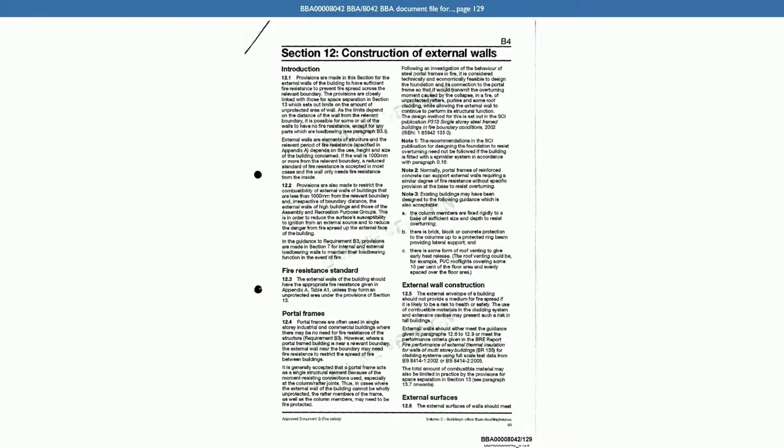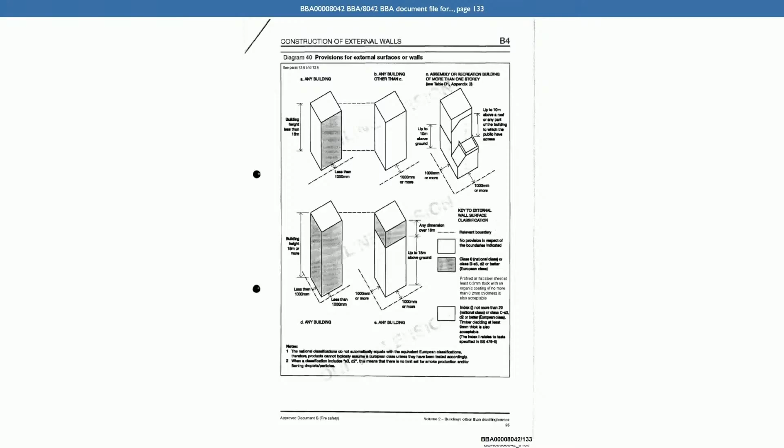Can we, I think we could take this quite quickly, but just to put it in front of you, can we look at page 133, please? Still within the technical file, this is an extract from approved document B, known as diagram 40, entitled Provisions for External Surfaces or Walls.

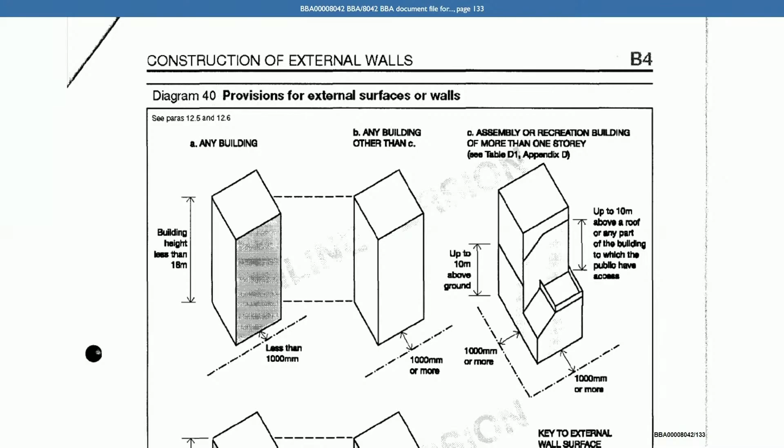If you look at the diagrams at the bottom of the screen, you can see there is letter D, any building, and letter E, any building. With letter D, you've got a boundary of less than 1,000 millimeters for a building of 18 meters or more in height, and E, same again, but this time 1,000 millimeters or more. Can you see that?

But there are parts of this build, these two diagrams, which are shaded. Yes. And so you've got one on the left, which is fully shaded, and the one on the right, letter E, which is partly shaded. Any dimension over 18 meters is the part that's shaded.

And then on the right-hand side of the screen, you can see under the rubric key to external wall surface classification, the second box down, which has the corresponding shading, says class 0 national class or class B S3 D2 or better European class. Were you familiar with diagram 40, this page of ADB, and specifically this part of it that I've just shown you?

All I knew in this regard was approved document B allowed the use of materials of limited combustibility to be used above 18 meters. That's all I know with regard to this. I may have looked at the details as shown here, but I can't remember. I never went into details because, as I say, this wasn't my area. It was way outside my area of expertise, really.

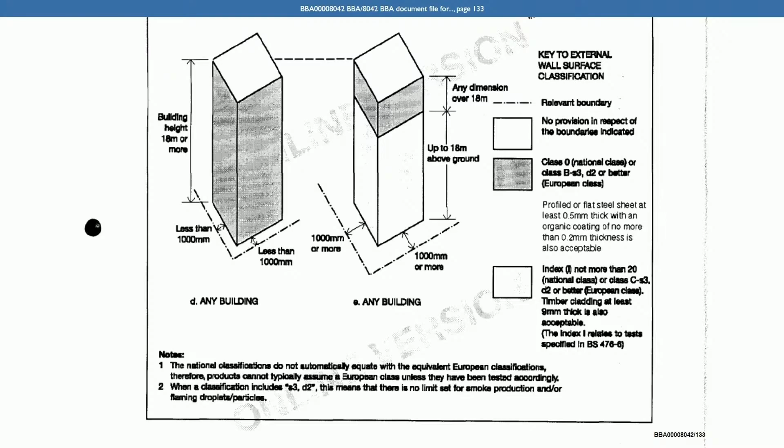Let's turn to your role then. You have confirmed you are a project manager at the BBA. That's correct. As a project manager, am I right to understand you don't necessarily have all the technical skills to make all the relevant assessments yourself? That's correct. And you would manage other people's input into the assessment, is that right? Correct. Are there areas you would have the technical skills to assess yourself?

My main role within the BBA was I was assigned to the structural department, and I would manage projects as normal by consulting various sections who would have input into the draft certificate, which I would make a start on. I also looked at the structural aspect. My area of expertise was in structures, strength of material structures, that I could make assessments. But on top of that, I would also offer any advice or technical support to any of the departments as required.

Now I'd like to ask you some questions about the reporting lines at the time. In 2007, did you report to Jeff Gurney? I believe so, I think somewhere around that time the BBA was undergoing some organizational changes. Jeff Gurney was my section head. And who did he report to? He reported to the technical manager, Brian Haynes.

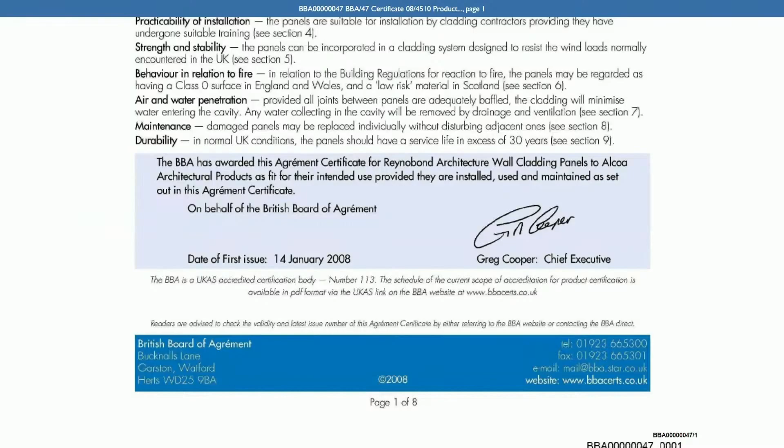Yes. What was your role in drawing up a contract for the subject? I think the project manager would draw up a contract, and with the approval of the section head, it would just go through. So I do recognize this particular email.

Would you read the technical file thoroughly in the process of drawing up a contract such as this? The technical file was compiled after the project was completed.

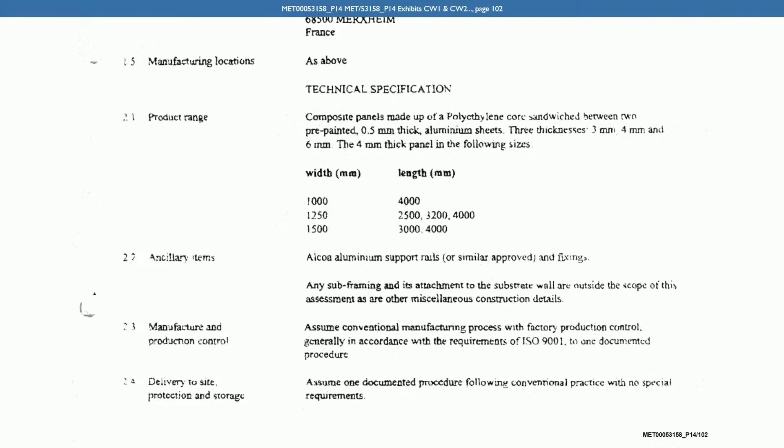When you look at 1.2, if we can scroll back up to the top of the screen, same page, under paragraph 1.2, under product type, where it says system, composite wall cladding system, what would be, or what was indicated by the word system there? I think the intention was to draw attention that these composite wall panels would be used in a cladding system, but it's not meant to be an accurate definition of the product we were assessing.

Were you intending to capture simply the flat product, the panel itself, or the product as fabricated into cassette or rivet fix, or attached to a fixing system? Our assessment was to ensure that the cladding material, this composite material, could be used in any cladding system, be it cassette or riveted. Our assessment stopped at the fixings. Anything beyond that would not be covered by the certificate. I think the certificate makes that clear.

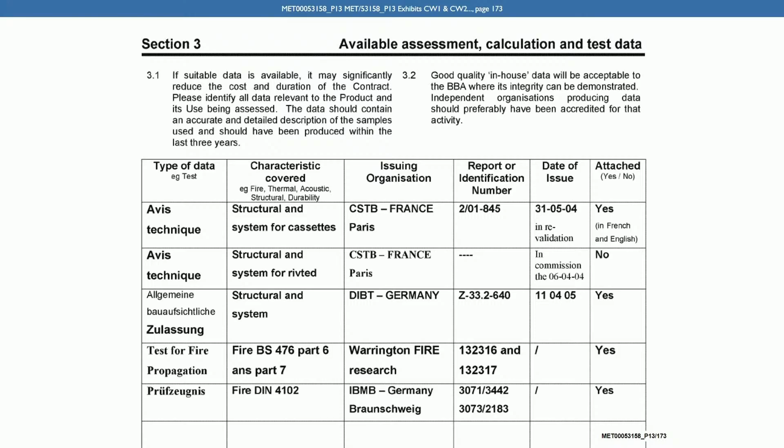When you looked at this application, did you notice there were two different technical opinions from the CSTB, one for cassette system and one for riveted system? Yes, but basically because their approach to assessment was different. They were assessing the system rather than just the panel on its own. Did you read these, do you think, at the time? So I think yes, I vaguely remember this. Yes, and as you say, there's nothing about these technical assessments about fire safety.

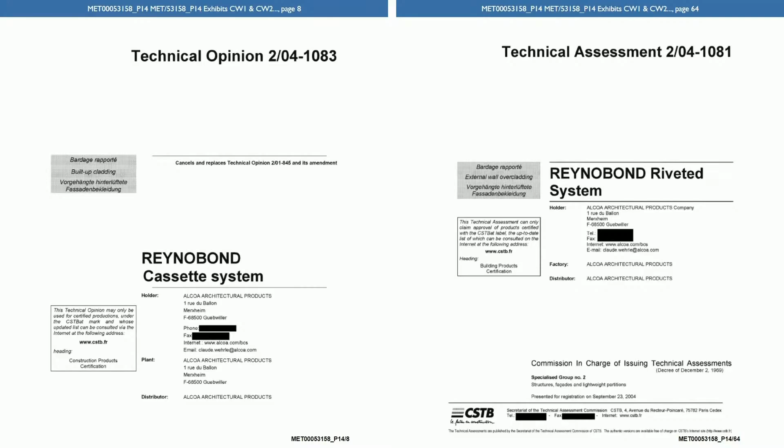Now can I then turn to the discussions that you had with Arconic starting in November 2006? Can we stay in this exhibit run, please, and go to page 114? This is an internal Arconic document, Mr. Gregorian, so you may not have seen it before, and you are unlikely to have seen it at the time.

Yeah, just pausing on the words next to your name there, ENG System Dept. Is that Engineering System Department? Engineering System Department, yes. Right. Do you remember this meeting at all? Late 2006, I can't remember, to be honest. No. All right, can't remember.

Let's look down at the document then and see how much of it you can help us with. If we go to item 1, you can see reason for visit: exploratory call to assess situation. I think that means assess situation as follows, with C. Wehr, that's Claude Wehrle, in attendance. Do you remember whether Mr. Wehrle attended in person or whether he attended by telephone? I can't remember that.

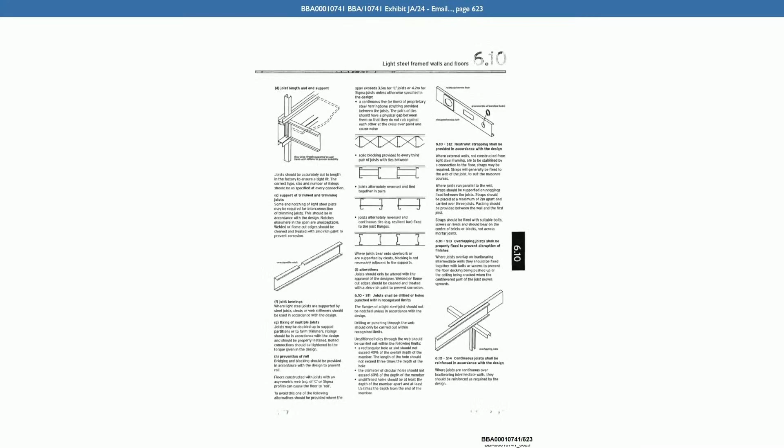Do you remember that? Yeah, I can't remember it, but that's what I must have said. The reason for that being a different approach to the assessment, and the fact that Avis Technique would provide all the information we need.

Do you remember - well, if we go to the top of the page we'll see it. Top of the page, second email down, the new cost was, as you can see, £18,015. So that was a reduced cost, wasn't it? I suppose, yes. Yeah, yes.

The cost reduction that was agreed and the reduction in technical hours that was agreed - was that as a result of the meeting on the 2nd of November 2006? It must have been, yes, I can't remember. It must have been. And was that reduction made because you could use the CSTB data for some of the aspects of the assessment? That would be my guess, and Bob Keyse would have agreed to that, I guess.

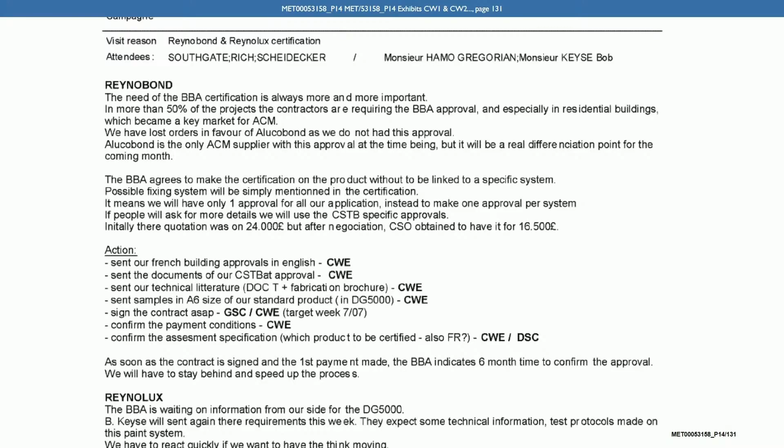Now, we saw from the 2006 file, as I mentioned a moment ago, that the BBA had on its file the CSTB Avis Technique approvals, didn't it? Yes. And do you remember I showed you these? They were two separate ones, one for cassette and one for rivet, yes? Mm-hmm, yep. Why wouldn't it have made sense for the BBA to make its own assessment on each fabricated system, in other words a BBA assessment on rivet and a BBA assessment on cassette, in the same way that the CSTB had done?

As I say, BBA philosophy was, I think, from an engineering standpoint, probably more sensible because the variables in a system are much more complicated than just approving a panel for suitability. So we adopted that approach for assessment of this particular product.

Could the BBA have insisted on assessing cassette and rivet separately in the same way that the CSTB had done under the Avis Technique approach? No, as I say, I thought from a quality control point of view, it was a much more sensible approach to assess the product rather than the system.

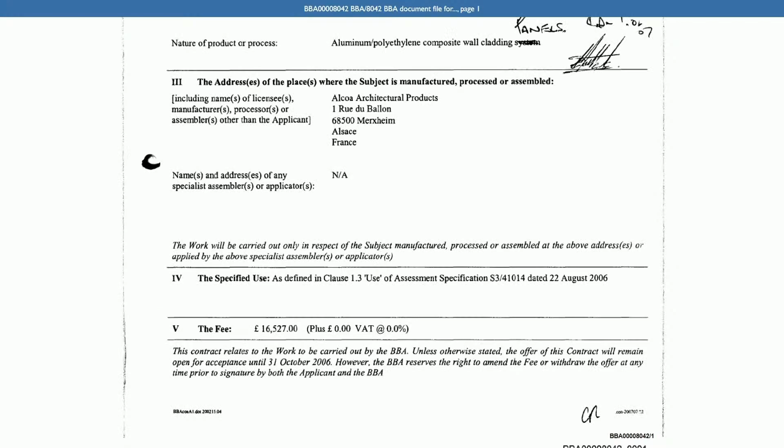Yeah. Now, we can see that there's a price, if you look a little bit down, further down the page, under item Roman 5, the fee, it's £16,527 and no VAT. And if we turn up a little bit, up the screen to item Roman 2, you can see the subject and proprietary name, Reynobond architecture.

Somebody's written 'architecture' in manuscript. And then underneath that, nature of product or process: aluminium, polyethylene, composite wall cladding system was typed, but then that's been deleted in manuscript and somebody has written in hand 'panels'.

Do you see that? Yeah. Do you know who wrote that? I can't remember who wrote that. Obviously at some stage we have decided that this is a better approach, and the contract was changed accordingly.

Does that change reflect the agreement or arrangement arrived at in Watford in the meeting earlier in February 2007 that we've been discussing? It must have been as a result of that, I suppose. I can't comment on that.

Now, we know, as I've shown you, the certificate that was eventually issued in January 2008. I want to look a little bit more closely at the assessment that led to that certificate. Can we turn on in the technical file, please, to page 11?

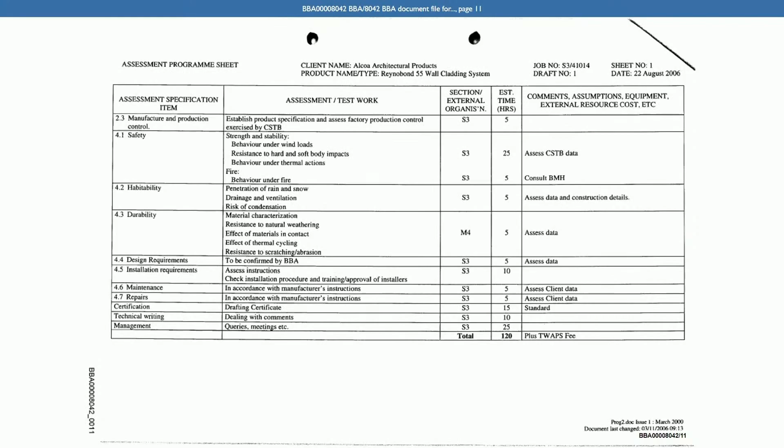This is the assessment program sheet. If one looks at the top left-hand side of the screen, you can see that. And the product name there is Reynobond 55 wall cladding system, as you can see in the middle of the page. And again, it still bears the date of 22nd of August 2006. Do you recognize this document?

Yes, I do. Did you prepare it? I think so, yes. Looking at the date of this document, and I know it says August 2006, would you have prepared it for the initial contract pricing? Yes, I think so, yes.

Right. Can we just be clear? Do you think you might have prepared this at the same time as preparing the offer for the contract in 2006 and then just not updated it when it came to finalizing the contract in 2007? Yes, I suppose. Yes, yes. I don't want to lead you into error by suggesting that, but we're trying to work out the dates.

Yes, it clearly says cladding system, but obviously the contract has been changed, and so has the pricing, and the number of hours, I think, must have been changed as well accordingly.

Can we then just be clear whether, even though there was that change from system to panels that we've discussed, you would still have followed the assessment program set out in this document when doing your assessment for the certificate that was ultimately issued? As soon as it was established that we were assessing the cladding panels, I would assess the product accordingly.

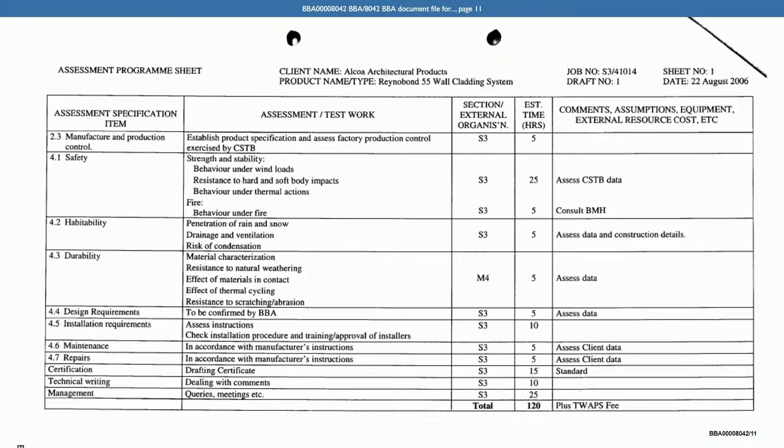Forgive my interrupting, Mr. Millett. Mr. Gregorian, just help me with this. You said a moment ago that you couldn't get any response from BRE - do you remember saying that? Yes. I took it from that you had contacted BRE yourself to ask for their assistance - is that correct? Yes. Would I be right in assuming you sent some form of information to BRE in order to obtain their assistance? Exactly, yes.

Can you tell us what it was, please? Documents, appropriate documents, maybe test data, and so on - anything necessary to make a fire assessment. I can't tell you exactly what it was, but it was all the information that Sarah would need to make an assessment.

Some of that information was presumably test reports, is it? Yes, I'm sure - yes, there must have been some test reports. Can you remember in what form you sent them or how you sent them? Most probably by email.

Right, thank you very much. Yes, Mr. Millett, carry on.

Thank you. We are going to come to some of that later on, when we'll explore the precise documents in a bit of detail.

Can I just understand this conversation — did Mr. Haynes report to you what Sarah Colwell had told him after the conversation had ended? He didn't. He just approved, or rather checked and okayed the particular statement relating to fire. I have no details as to what conversation went on. I have no idea. All I know is that I distinctly remember him talking to Sarah.

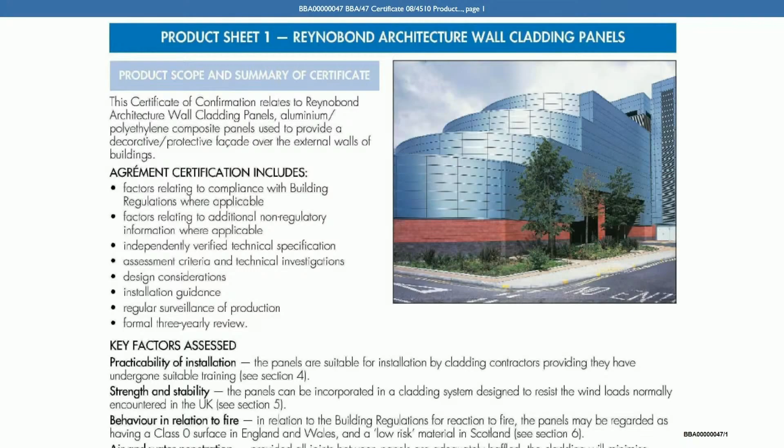We'll come back to this page shortly, but can we go to page 3, please? At the top there, you'll see in the dark blue band, the word general, and under it, it says this: this certificate relates to Reynobond architecture wall cladding panels comprising an aluminium/polyethylene composite material fixed to an aluminium subframe to provide a decorative/protective rain screen facade over the external walls of buildings, as we saw on the front. And then it says the subframe and its attachment to the substrate wall are outside the scope of this certificate, as are other miscellaneous construction details.

Does that mean the metal rails that the cladding is fixed to? That's correct, yes. It's not covered by the certificate, that's correct.

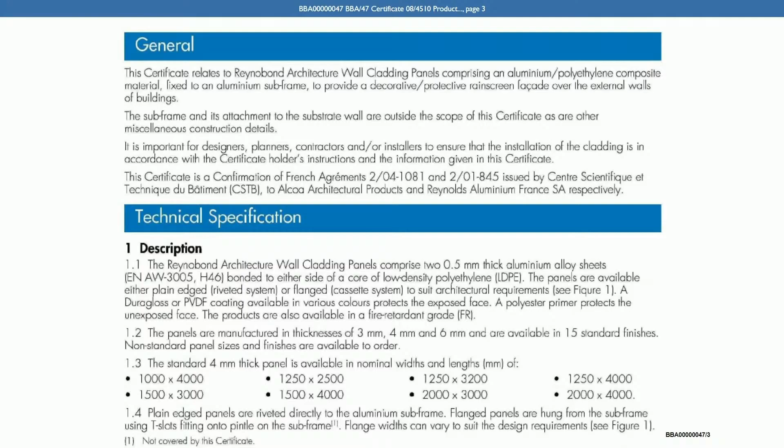And what about other elements of the facade build-up, such as the insulation and the cavity barriers? They're presumably, no, they're not covered at all. Outside, no. Now, if you go down to the next blue header, technical specification, you can see description.

Underneath that, it says 1.1, the Reynobond architecture wall cladding panels comprise two 0.5mm thick aluminium alloy sheets, and then there's a specification there, bonded to either side of a core of low-density polyethylene, LDPE. The panels are available either plain-edged, riveted system, or flanged, cassette system, to suit architectural requirements, see Figure 1. A Duragloss or PVDF coating available in various colors protects the exposed face. A polyester primer protects the unexposed face. The products are also available in a fire-retardant grade, FR.

If we skip down to subsection 1.4, it says this, if you just read with me: plain edge panels are riveted directly to the aluminium subframe. Flanged panels are hung from the subframe using T-slots fitting onto pintle on the subframe. It says flange widths can vary to suit the design requirements, see Figure 1. There's a little footnote underneath that which relates to the word subframe, and again it says not covered by this certificate.

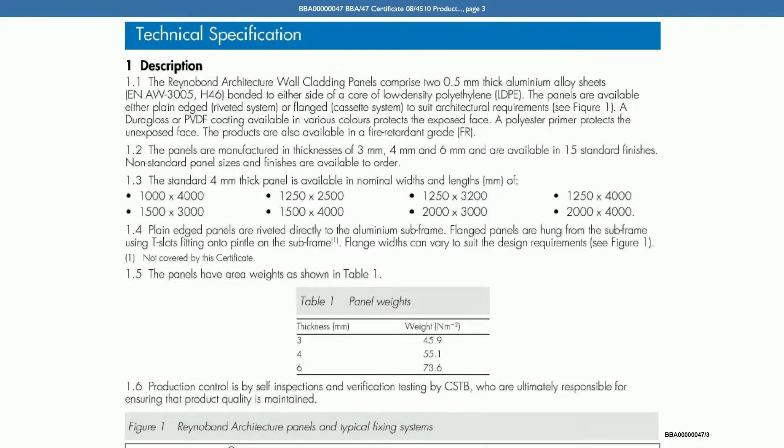Now, the Figure 1 that's referred to there is apparent if you look a little bit lower down the same page. If we can scroll down to Figure 1, have that fully on the screen, you can see it says Figure 1, Reynobond architecture panels and typical fixing systems. And there within Figure 1, you can see two systems. You've got on the left, riveted system, and on the right, cassette system.

Do you remember where those diagrams came from? They must have come from the CSTB documents. So not from Arconic, is that right? They might have come from Arconic, but normally I would imagine CSTB would include some details of this nature in their certificate. Do you recall how Figure 1 came to be on this certificate?

It was considered appropriate to include these just to show what can be done with this cladding material, with this panel material. Was it you who decided that Figure 1 should be inserted in this certificate? It is quite normal, accepted practice within BBA to include some construction details of this nature.

Well, it's a bit more, isn't it, than showing what can be done with this cladding material. Isn't the certificate telling the reader that the panels, whether riveted or cassette, are covered by the certificate?

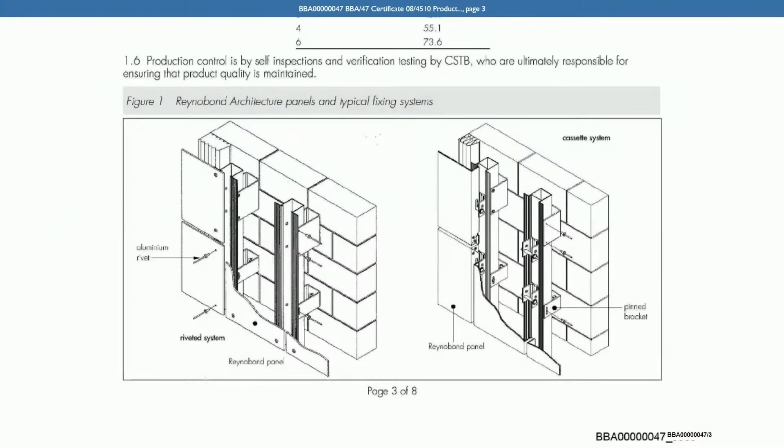Well, you say that. Let's just go back to 1.4. You could see the footnote, footnote 1 there, not covered by this certificate. And that relates, doesn't it, to the subframe. And that's consistent with the exclusion of the metal subframe on the front of the certificate. So what this certificate is clearly excluding is the subframe. That's correct. Anything to do with the fixing to the subframe and the subframe to the brickwork.

Substructure is irrelevant, but these are just details to show how the material could be used in a cladding system. Yes, anything to do with the fixing to the subframe and the subframe to the brickwork, the substructure, you say, would be irrelevant. What I'm suggesting to you is not excluded is the form of fabrication.

In other words, the panel as fabricated in rivet and as fabricated in cassette is included. The dimensions of the panels would be decided by design, by a suitably qualified engineer. So it could be any dimension, providing it satisfies resistance, for instance, to wind load or impact load. There are so many structural considerations.

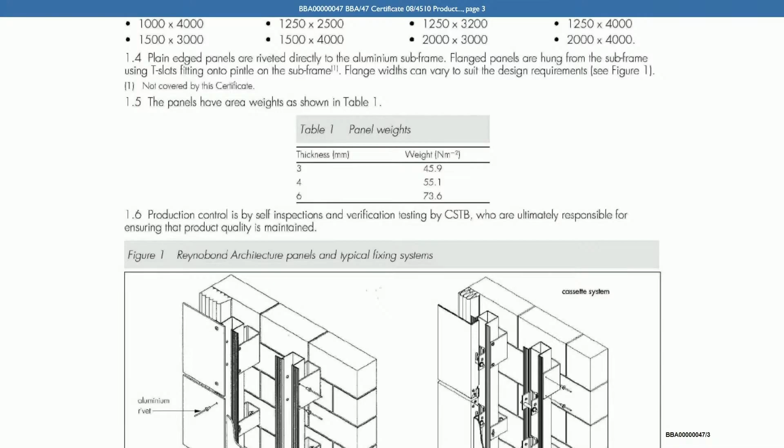Did you draft paragraph or section 1.1 and section 1.4? Sorry, I can't see the 1.1. So yes, can we just scroll up, please, to there? 1.1 and 1.4 are now visible on the screen, I think, Mr. Gregorian, for you. Do you remember whether you drafted those parts of this certificate? That would have been based on the contract. Right, based on the contract. Yes. But was it you? I'm asking whether yes, it was. Yes, I must have done that.

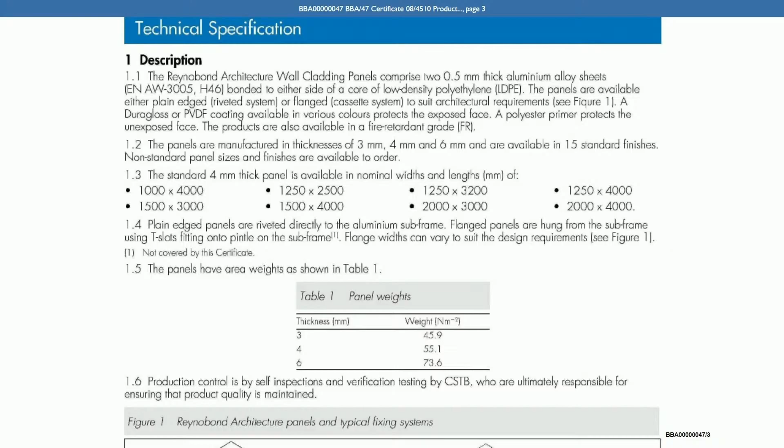Yes. Can we go to your statement, please, at page 4? And I'd like to go back to where we were, which was question D, in particular what consideration the BBA gave to, and you've seen Little Roman 1. I'd like to go to Little Roman 2. The question is what consideration the BBA gave to the fact that CSTB issued separate certificates for cassette and for face-fixed riveted fixings. And your answer there is, in normal operation, both types were considered suitable for incorporation in a cladding system. For behavior in relation to fire, consideration would have been by a fire expert.

See answer to D1 above. If you look at the bottom of the page, I just want to look at question 7. Question 7, what products did certificate 08/4510 cover? In particular, please address the variants. A, core type, standard PE or FR. And then over the page, looking at little b, which is what I want to focus on, fixing method, face-fixed riveted or cassette. And your answer is both.

And looking at that answer there, can I take it from that as far as you were concerned, the certificate covered Reynobond, both in its fabricated form in rivet and in its fabricated form as cassette? The certificate would cover, the material could be used either as face fixed or riveted, and both were considered suitable. So in other words, the material could be used in any of these two configurations. And the certificate covered the product in use in those two situations?

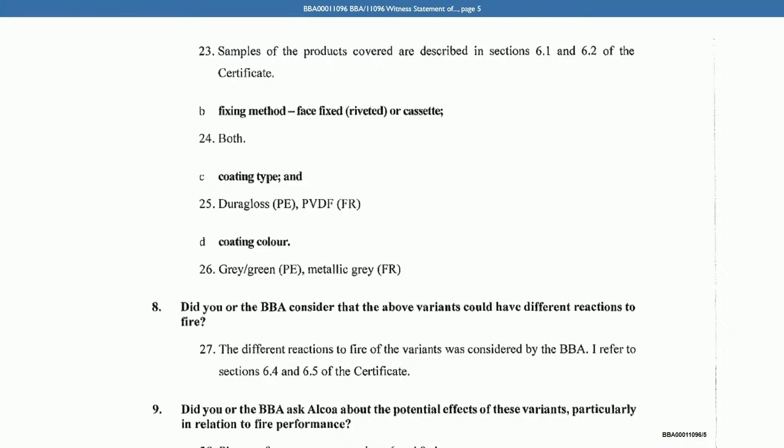Now, first, do you remember who drafted or formulated those words - the panels are judged to meet the class 0 requirements?

I think this was standard format of expressing classification of products. So is that an example of you, as it were, cutting and pasting or copying across? Yes, yes, I think so, yes.

So just to be crystal clear, this isn't a form of words that had come from Brian Haynes or perhaps suggested by Sarah Colwell? No, it's something that I would put forward for comment to the appropriate department. Yes, I see. Now let's go to page 5, please, and let's look in detail at section 6.

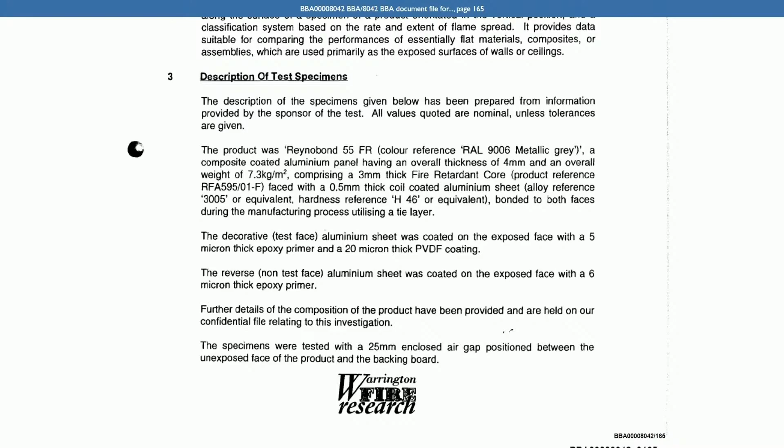If you skip to the next paragraph, the decorative test face aluminium sheet was coated on the exposed face with a 5 micron thick epoxy primer and a 20 micron thick PVDF coating. If you look at page 167 of this report, there are blank pages in between. At the very bottom, you see the test results and classification, and in bold capitals it says: in accordance with the class definitions given in BS 476 Part 7, 1997, the specimens tested are classified as Class 1.

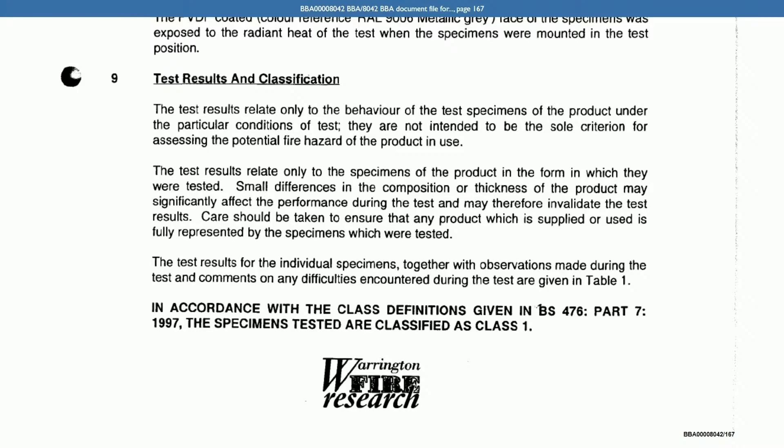Now, if we go on to page 169, this is the second issue of this report, dated the 12th of September 2003. If we look at the test that goes with it, this is the Part 6 test, in the technical file at page 177. We can see it's a Warrington Fire Test Report number 132317, this time under Part 6 of BS 476. If you go down to page 179, paragraph 3, you can see again the description in the same format. Second paragraph, the product was Reynobond 55 FR, color reference RAL 9006 metallic gray, etc.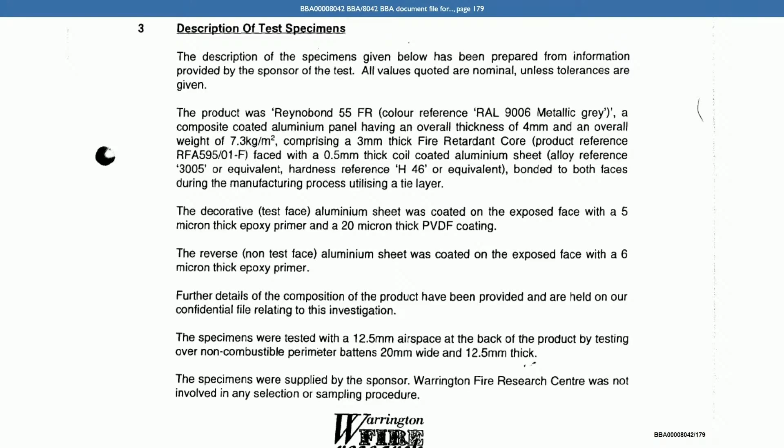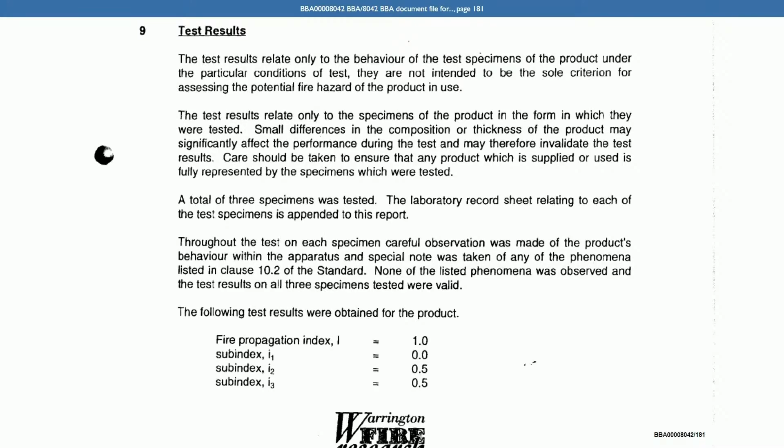And the same decorative face again. It says, again, it comprises a 3 millimeter thick fire retardant core. So this is the test on the same product as the one we were just looking at, but done under Part 6. We have the test results at page 181, and at the bottom of that page we can see the test results set out there. For completeness, we can go to page 183 and see the date of issue, 12th of September 2003.

Now those are the FR tests from 2003 done under BS 476 parts 6 and 7. Can we now go back to page 5 of the BBA certificate, BBA 00000047, and look again at section 6.2. It says there, a fire retardant sample of a product with a metallic grey PVDF finish, when tested in accordance with BS 476 part 6, 1989, achieved a fire propagation index, capital I, of 0, and when tested in accordance with BS 476 part 7, 1997, achieved a class 1 surface spread of flame. Is it right that the two tests I've just taken you through quite quickly are tests of the specimen mentioned in section 6.2 of the BBA certificate?

Again, I'm not familiar with the... I'm guessing at some stage the fire expert would have looked at this, but I really can't go into detail as regards the statements. I think whatever we said in paragraph 6.2 must have been a statement of fact. That's all I can say. Sorry, do you want to continue? I'm so sorry, I spoke over you. Do you want to say something more? Have you finished your answer?

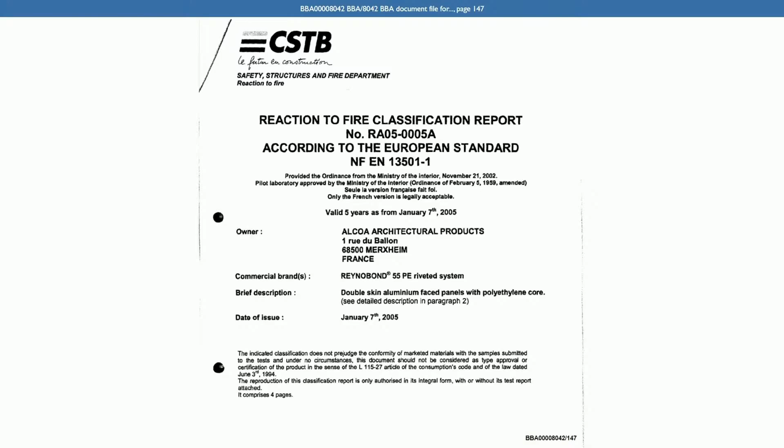You see that. And if you go to page 149, please, you can see that there's a product description under paragraph 2 on that page, and you can see that it's described as a composite panel consisting of a low density polyethylene core thermally bonded using a 70 micron thick polyethylene film between two pre-coated aluminium sheets, tested system riveted on metallic substructure. And then underneath that, at the bottom of the next block of text, it says finishing coat Duragloss 5000, color grey-green.

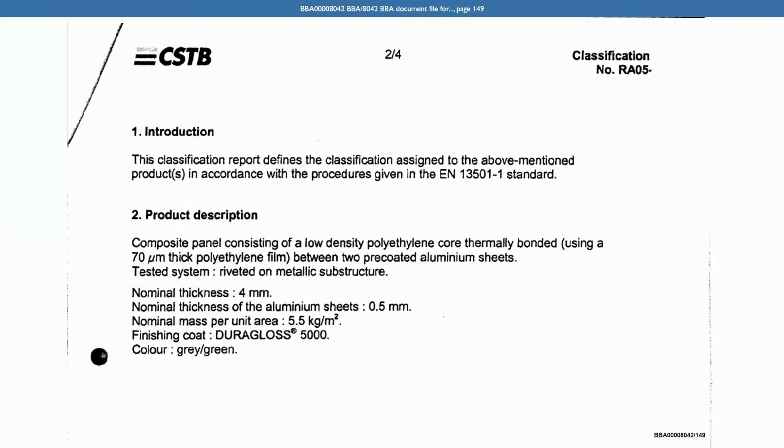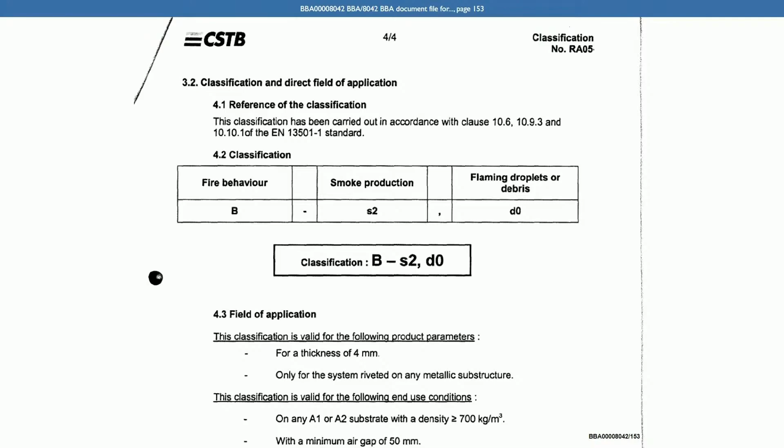And then if we go down to page 153, we can see the classification BS2D0. And below that, you can see there's a date, 7th of January 2005. The signatures at the bottom from the CSTB. But a little bit above that, under field of application, you can see it says this classification is valid for the following product parameters. And then the second bullet point there says only for the system riveted on any metallic substructure.

Now, my first question is: is this document familiar to you? I must have looked at it at some stage, but I can't remember the details. Right. Okay. It was on the technical file, and we know from other evidence we'll come to that you were sent it by Arconic in 2007. So I'm going to assume you were familiar with it.

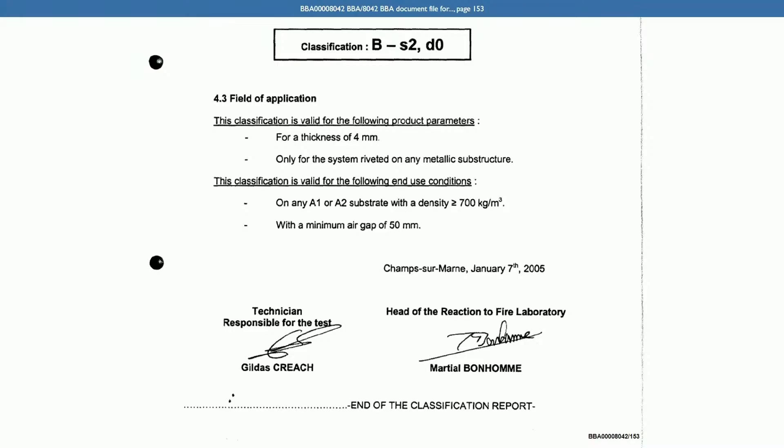Can we go back then to section 6.1 of the BBA certificate at page 5 of that document, BBA 6047. And can we have that up on the screen at the same time as test 5A, classification 5A? Just put the two up together. That's BBA 8042 at page 147. You can just have that, please, at the same time. BBA, yes, thank you very much. Just looking at those side by side, does the certificate at section 6.1 record classification 5A?

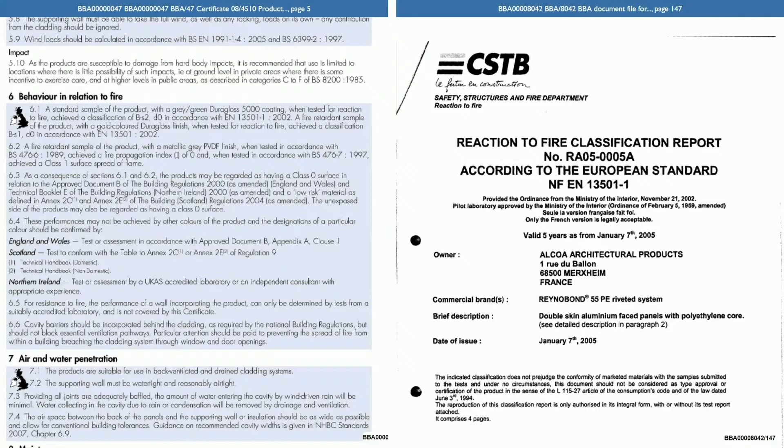Let me see if I can help. If you go to page 153, as I showed you, it's where you've got the actual classification in there. I appreciate this is a long time ago, so you need to see the documents. You can see the classification report 5A has the classification B S2 D0.

Cast your eye to the left-hand side of the screen under 6.1, you can see it says that the standard sample of the product, when tested for reaction to fire, achieved a classification of B S2 D0. EN 13501. Looking at those two documents now together, can you confirm that the certificate tells us that at section 6.1, the reference to the classification there is a reference to this classification in this classification report? Yes, I can confirm that, yes.

And that pertains, doesn't it, to PE cored Reynobond, yes? Yes, in the riveted system and only in the riveted system, yes? Again, this was a document provided by CSTB. So that is how they would assess fire performance. My question was that it pertains not only to PE cored Reynobond, but to PE Reynobond in the riveted system.

Yes, yes. But as far as our assessment was concerned, it's quite immaterial or irrelevant how the fixing was done. As far as BBA was concerned, it was the product we were assessing. So whether it's riveted or cassette fixed was to some extent irrelevant.

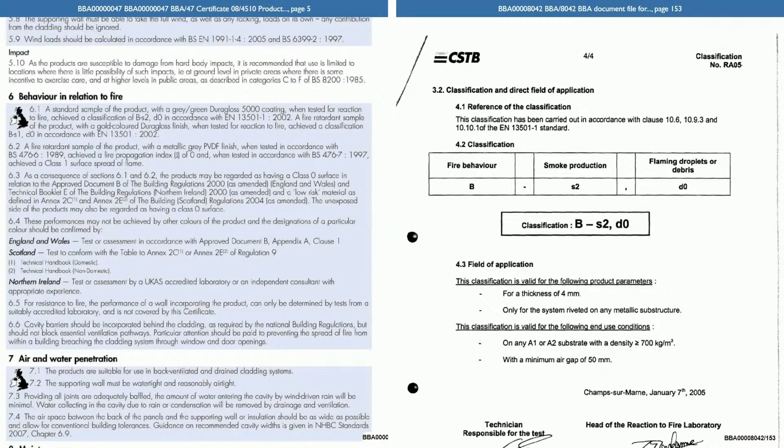Can we go, please, to MET 30/53158 P15 at page 90. This is an exhibit to Mr. Verlet's statement. And this is an email from you to Mr. Verlet on the 15th of May 2007.

And you tell him that good progress is being made in relation to the assessment, but you need further information. And you set out four paragraphs there. The first one says, reaction to fire test data for the standard PE panel. If not available, you'll need to arrange for the tests to be done. As for the FR product, please note that the French classification as described in the Avis Technique is not recognized in the UK. Fire test reports for the FR product already submitted with your application.

And then if you look up the screen, you can see that he sends you on the 25th of May 2007 the classification report RA05, and we take it from me that that is what he sends you. Hello Hamo, please find enclosed the fire reaction certificate for our product Reynobond PE.

And then if you look a little bit above that, please, if you go to page 96, I think you'll need, you go back to him, page 96, and you say in response to him, also on the same day, 25th of May, Claude, the document is acceptable. Thank you. I look forward to receiving your response to items 2, 3, and 4 of my email below. So you asked him for the test data for PE, and he sent you classification report RA05 that I've shown you.

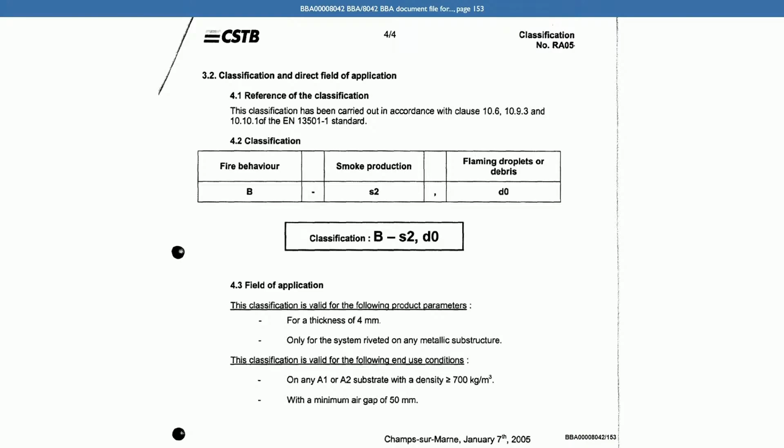Going back to section 6.1 of the certificate, please. BBA 6047, page 5. You can see what's said there. I've read it to you now twice. You can see it doesn't refer to the fact that classification RA05 was of the rivet system only.

Cutting to the heart of the point, the question is, why not? Why doesn't it say? Sorry, which paragraph is that? 6.1. 6.1, yeah. You say a standard sample of the product achieved a classification of B-s2, d0. The question is, why doesn't it say a standard sample of the product in rivet fixing?

Again, because it was, as far as the fire performance was concerned, irrelevant in what context it was. It was just the actual surface, the spread of flame, I believe these things refer to, and it was irrelevant how they were fixed. The information we got from CSTB was a riveted one, but I believe maybe as a result of my discussion with Brian, we decided

that's suitable irrespective of the fixing methods. Given that the CSTB had provided test data on the product in riveted form and to be used only in that fabrication, why did you consider that drawing the distinction between rivet and cassette in this subsection of the certificate was irrelevant? Because we were covering the panel material, not the fixing method.